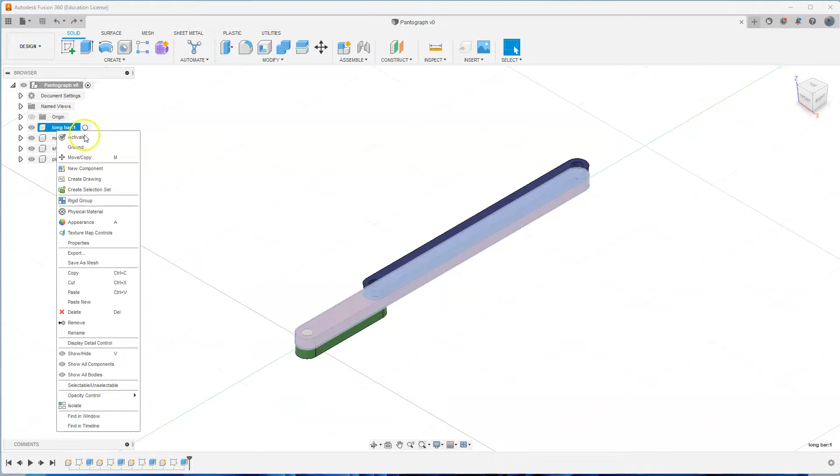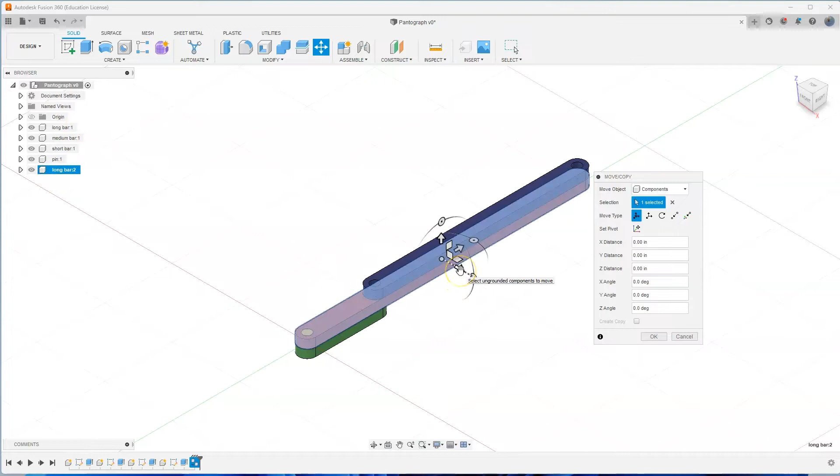To make a copy of the long bar, go right-click on long bar at the browser and just click copy, and then right-click on the pantograph on the parent and hit paste. And one instance of the long bar is actually on the same place where long bar 1 is. And as you can see, it says long bar 2. All you have to do is drag or move that long bar to a different position for you to see it. So click OK after you've done that.

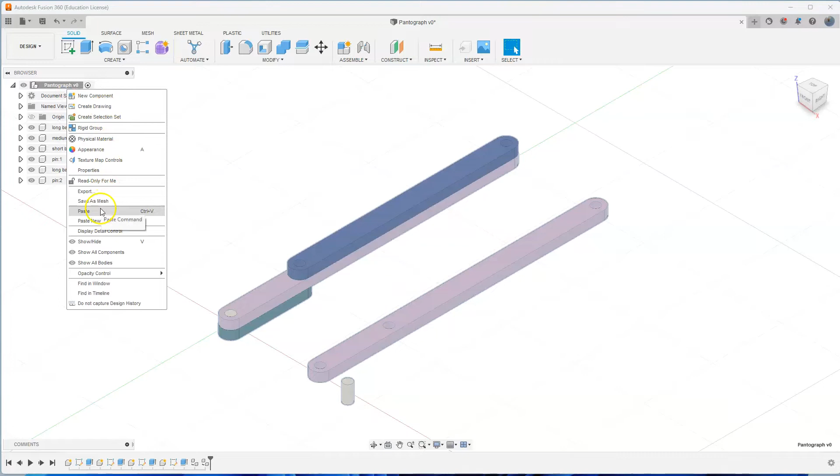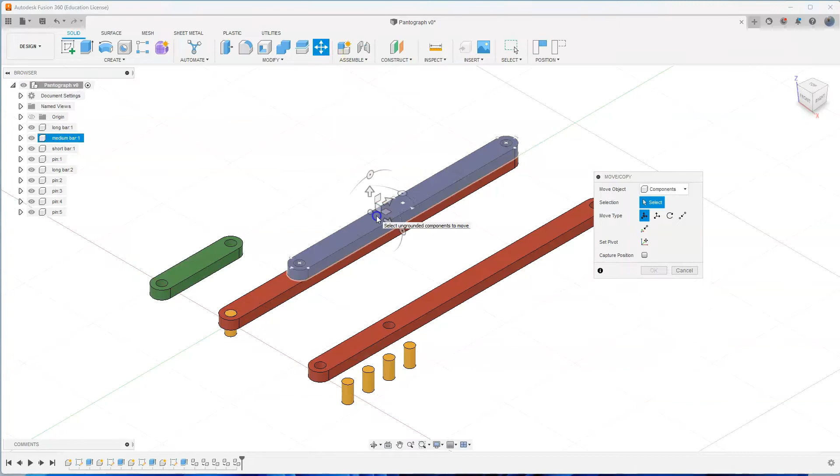All right, we also need to make copies of the pin. We need to make 4 copies of it. So right-click pin, copy, and then right-click on pantograph, hit paste, move the copy. So that's 1. And then do 3 more, paste. So that's 2. So now we have 5 pins in total. And let's just move the short bar as well, and the medium length bar. Okay, let's do the same thing with this first pin.

Now the next step is for us to create joints. So click joint, and then you'll notice that we are going to attach joint origins. So if I move my mouse on top of the pin, you'll see something showed up. That thing is called a joint origin. It says place joint origin on a component. And normally a component would have several joint origins, one at the top, one at the bottom, somewhere in the middle, and also it sometimes shows up on the edges.

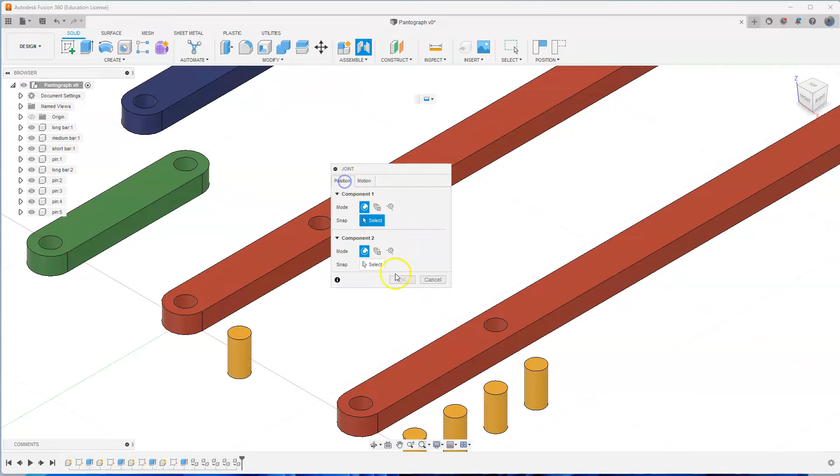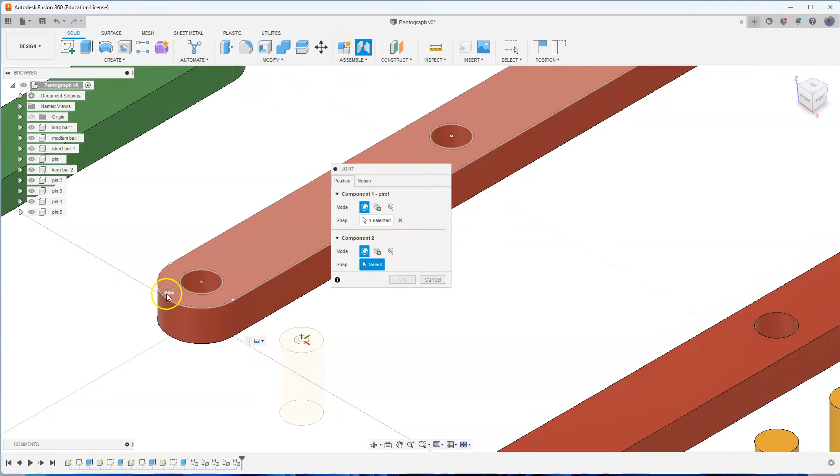For the motion, we want it to be rigid. So let's attach one joint origin here at the top. And the behavior is once you attach a joint origin, that component becomes less visible until you select a second place for your second joint origin. So for the second joint origin, we're going to put it on the first hole. And there's several ways for you to select the first hole. You could move your mouse on the circles or on the arc of the slot. As you can see, I could select the middle still. All right, so let's just do that there.

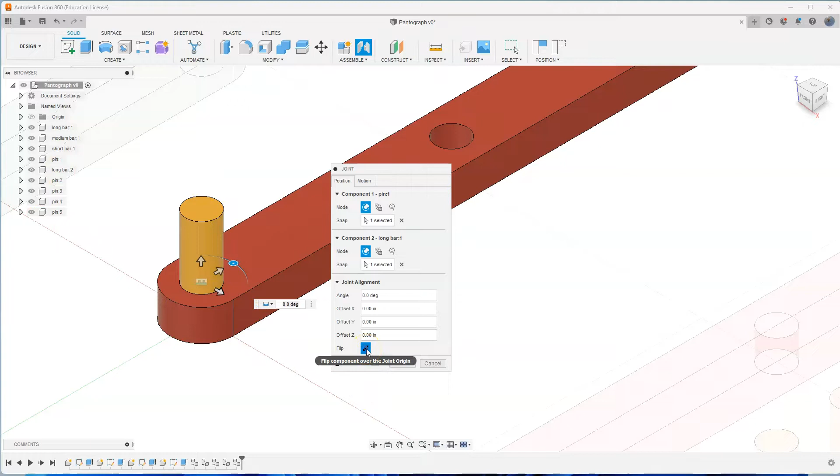And this is the correct orientation of the pin. If your pin attached in a different way, you might have to click on the flip button, which is this one right here. Let's say you attach it and it came out like this. So all you have to do is click on that flip component over the joint origin and then click OK. So let's try to move this component. So both of them are now together in a rigid joint. And if I move the long bar, or if I move this pin, you can see both of them move at the same time.

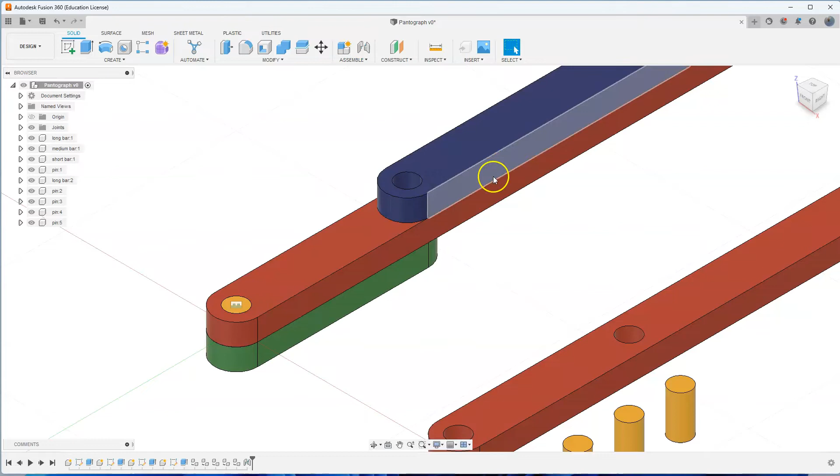So let's revert back to the old position. So click position, revert position, and it just takes back. Oh, let me undo that. I don't want to revert that position. So let me just drag it here, just so that we have a starting point instead of reverting the position of all of the components.

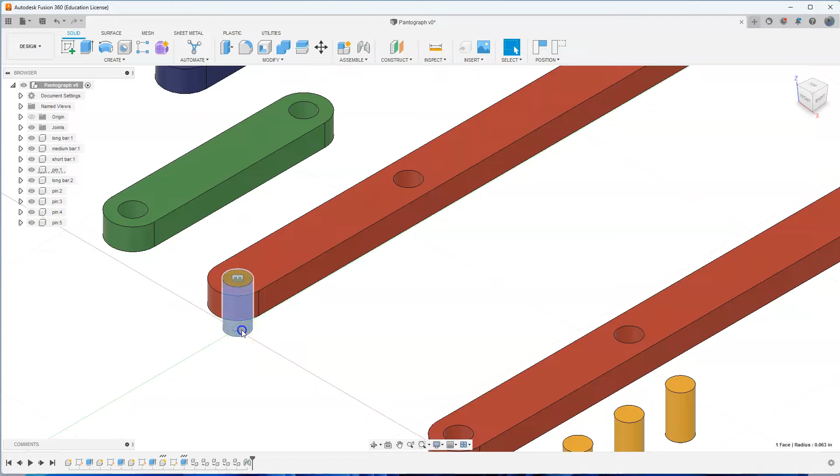The next thing we want to do is we want to right click at pin 1. So this is pin 1. I want to right click on pin 1 and ground it. Okay, and then just capture the position. And so now, if I try to move the long bar, it won't move along with the pin because the pin is grounded, so the long bar won't move at all also.

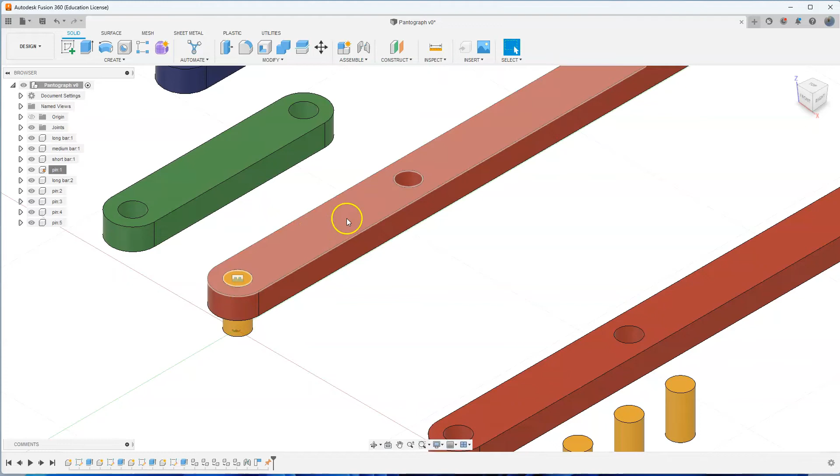Okay, so let's go ahead and let's do the next joint. Click joint and let's go to motion, and this is another rigid joint. Click the top of another pin and then click the top of the second hole. Click OK. And that's the next one.

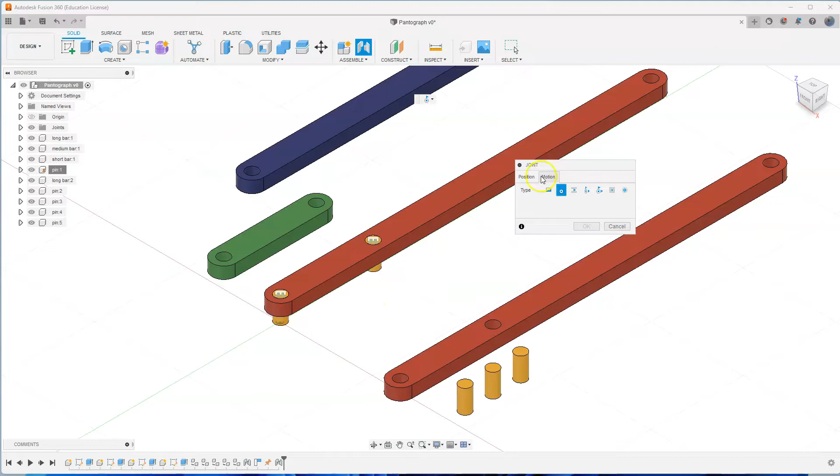All right. Now we're going to do another joint, but this time we are going to create a revolute joint, which allows components to rotate around an axis. For this one, I'll click at the bottom of this pin, the second pin that we put, and the bottom of the green one.

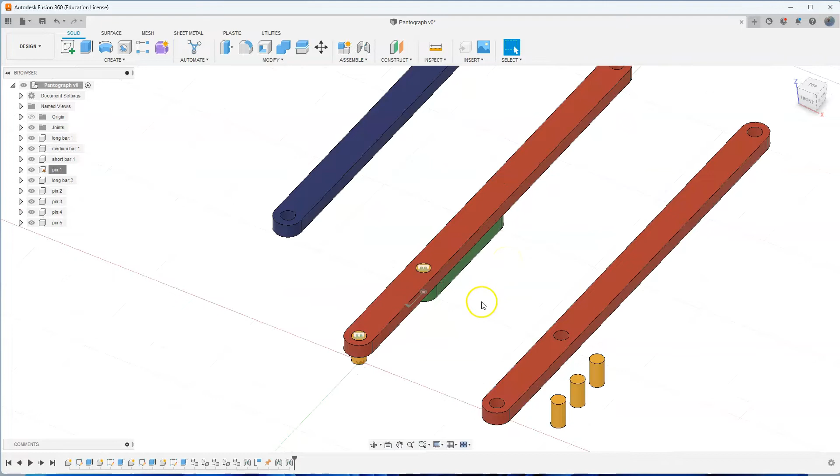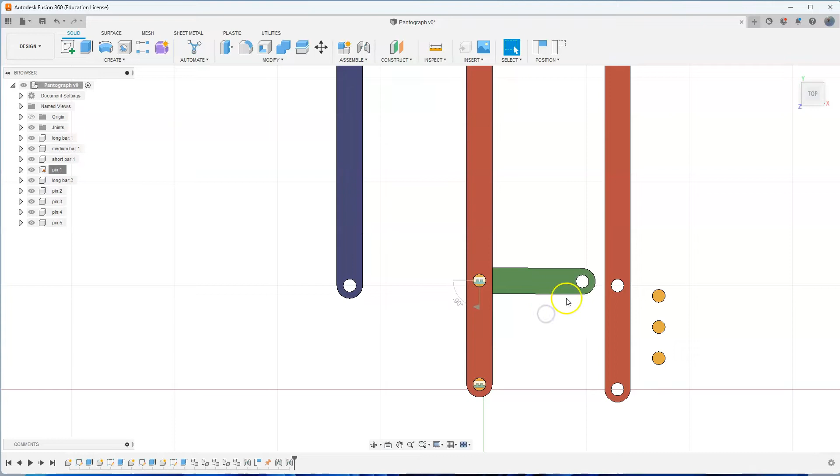Okay, click OK. As you can see, the short bar went under the long bar, and it could now rotate freely around that pin. So if I click, I could rotate it. I want this at 90 degrees. You'll see the angle showing up right here, so let's say negative 90 degrees. That would be that, and I will capture that position so that it stays there.

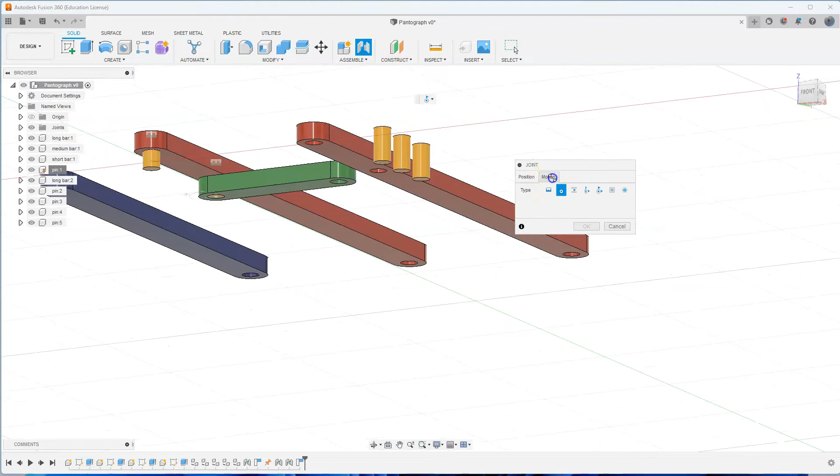All right, next let's attach another pin. So joint, and select the bottom of one pin. Let's make it another revolute. Let's select this pin and select the bottom of this hole, then click OK. So there we have another revolute joint connecting these two.

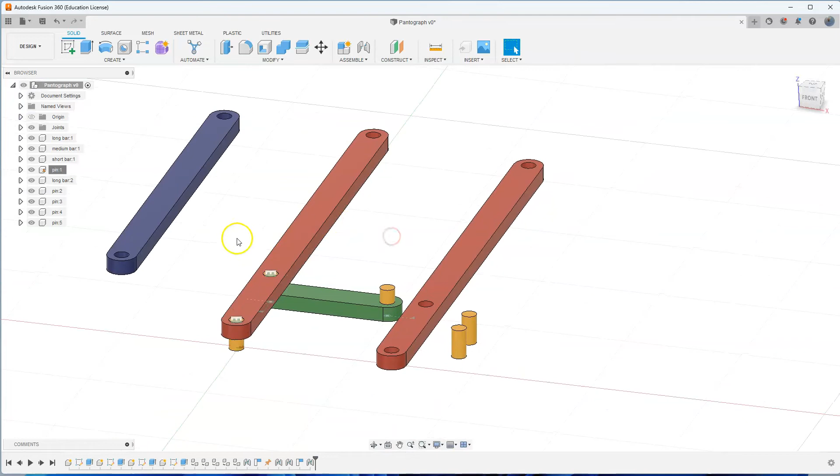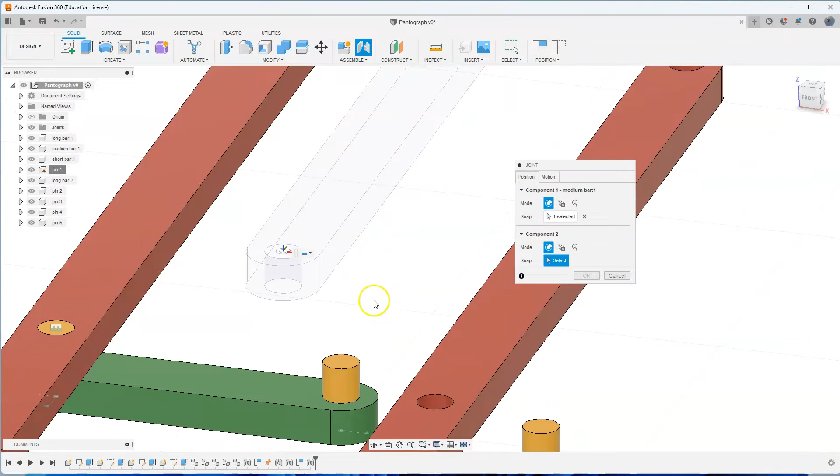Next we are going to add the medium bar to it. So joint, this time we are going to create a rigid connection between these two. Click at the top, and then click at the top of the pin. Then click OK.

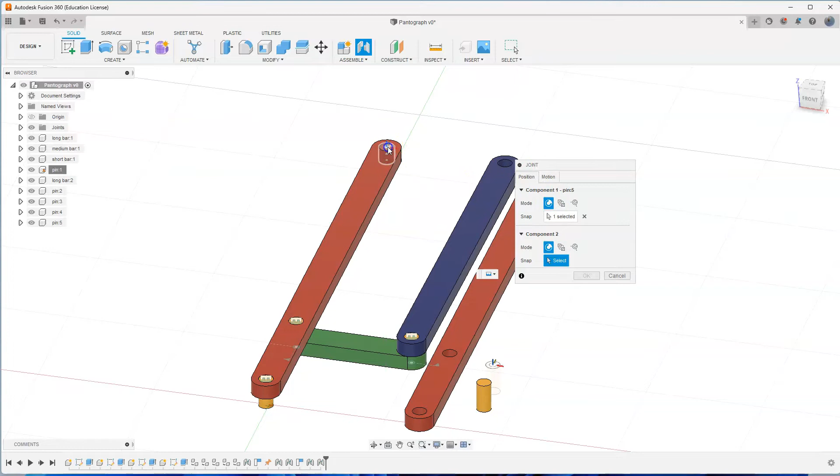Next we're going to add another pin using the joint command once more. Click on one of these pins, doesn't matter which one, and we are going to do a rigid joint again, then click at the top of this hole of the bar and click OK.

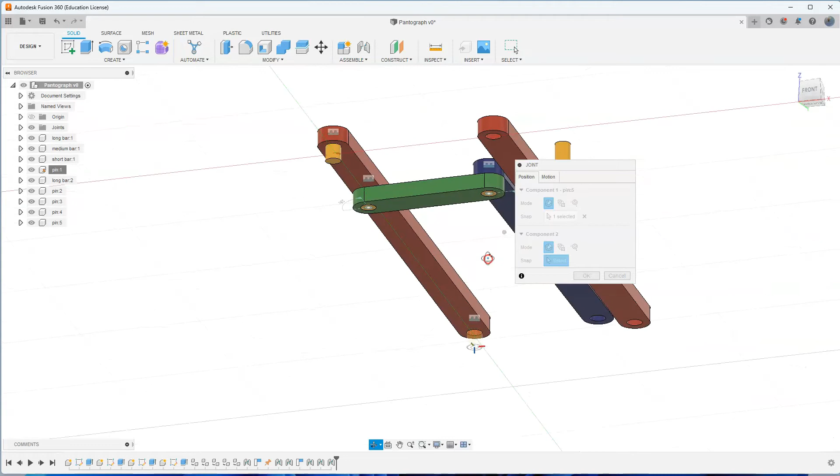Okay, next one, let's do another joint. This time we're going to do a revolute, attaching this with this piece. Click OK, and let's see what happened. All right, it got attached right there.

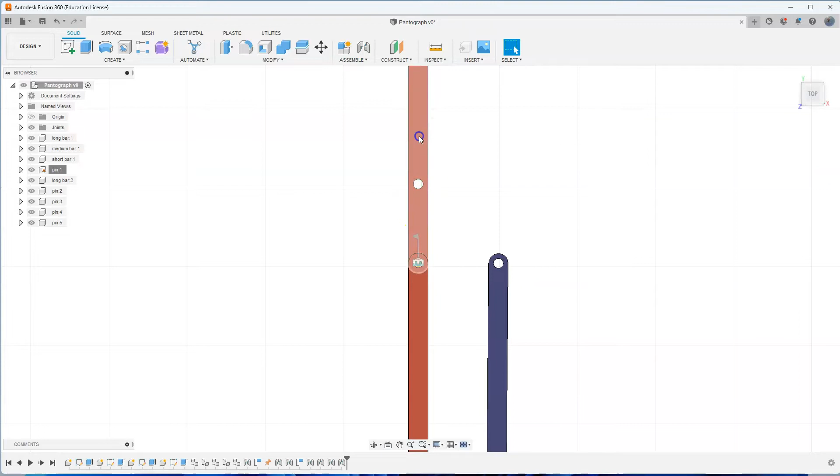Let's click at the top so that we could see it. Then we're going to rotate this, and you'll see the angle. I'll rotate it at around 90 or at 90 degrees, and I will capture that position.

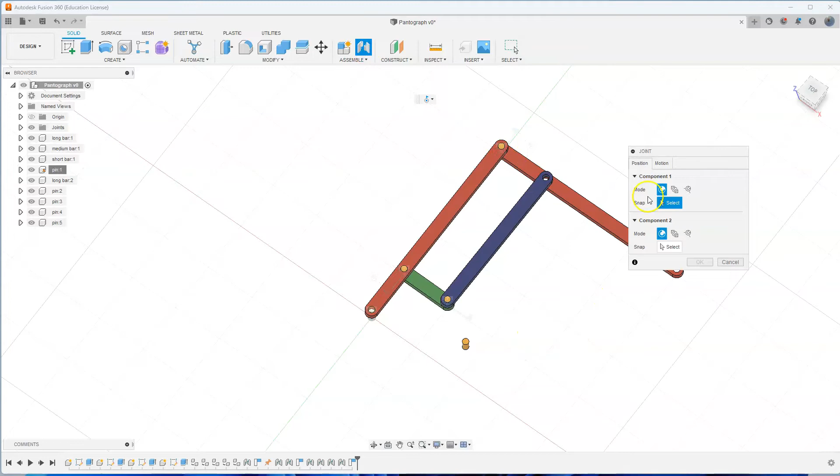So the last one is for us to put this last pin. One more, let's create a joint. Let's create a rigid joint for now. Click at the top and the top of the hole as well here. Click OK. I'm just going to move this bar out of the way.

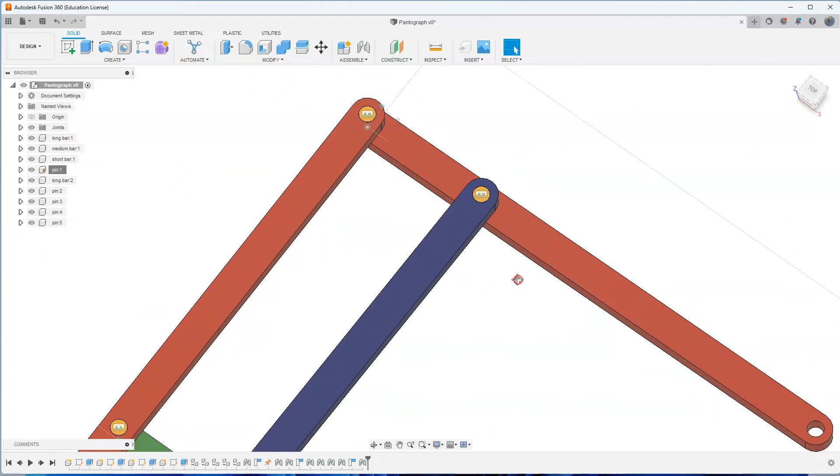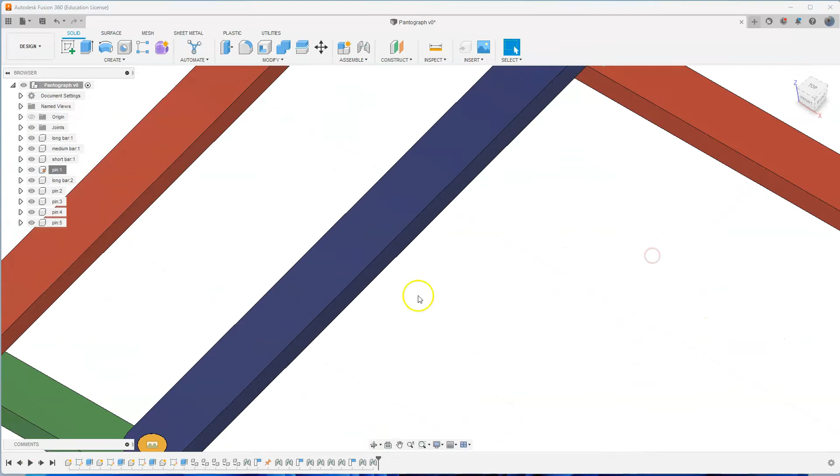And I will create another joint. This time we are doing a revolute once more. Click here at the bottom of the pin, and then bottom of this hole. Click OK. Let's zoom out and test our pantograph and see the movement.

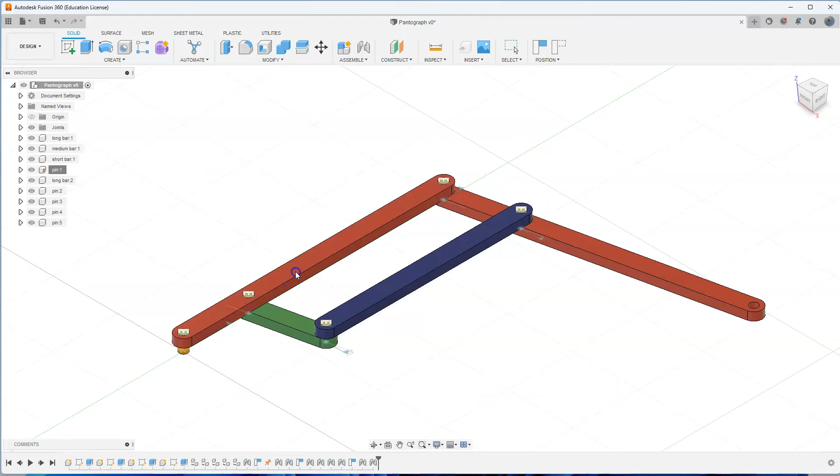So if I click and drag on the medium bar, you'll see that I'm able to create movement. If I select the long bar, it won't move at all, and we normally want that to move, which means this joint that I made should have been a revolute joint.

So I could go edit joints by going here where it says joints, and the first rigid. As I select rigid 1, you'll notice that this gets highlighted. I could right click there and edit my joint, then click motion and change the motion to revolute, click OK. Now if I move this, I could push and have that move around the axis of the first pin.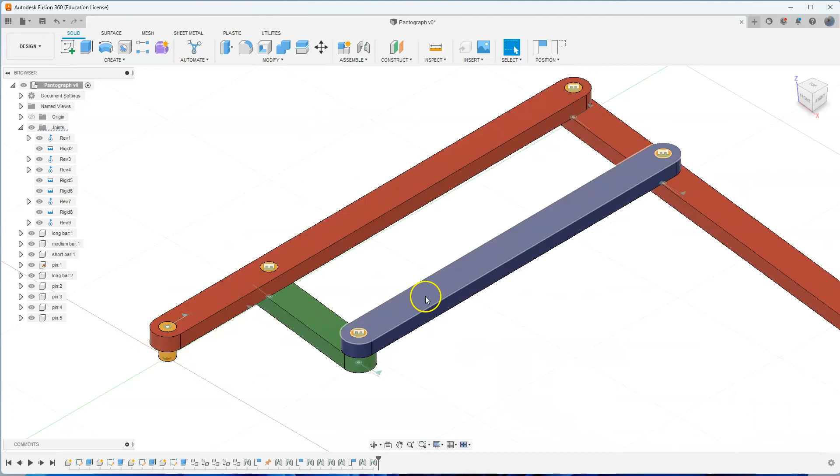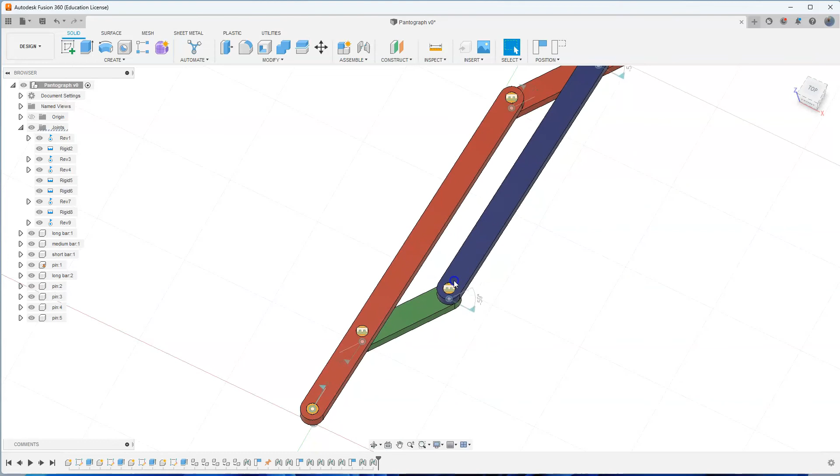All right, so the only problem with this is if I do this, there's interference. As you can see, it would go inside, and that's something we don't want, like that. So we don't want that to happen.

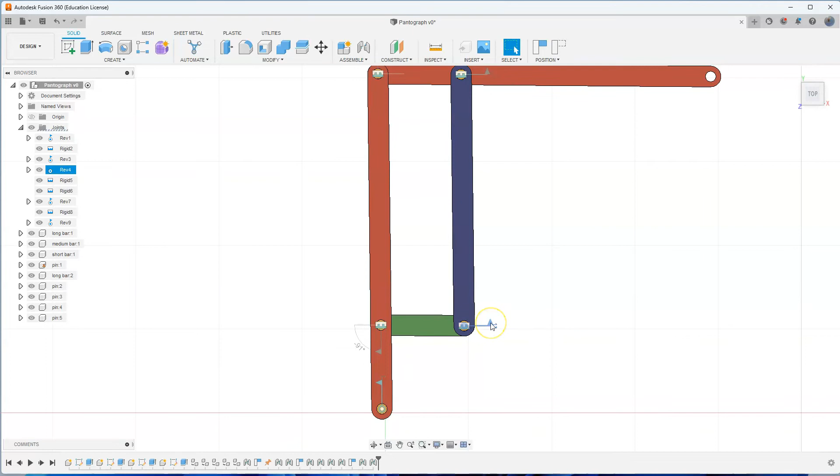So what I'm going to do is some edits on the revolute mate, or the revolute joint, of this one right here. If I select that, it says it's number 4. Let me go on revolute number 4 and click on this down arrow. It says edit joint limits, and then I could supply a minimum and a maximum.

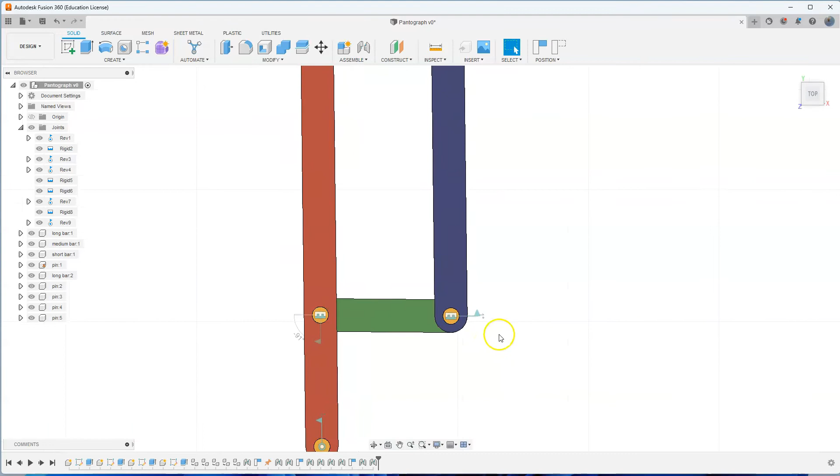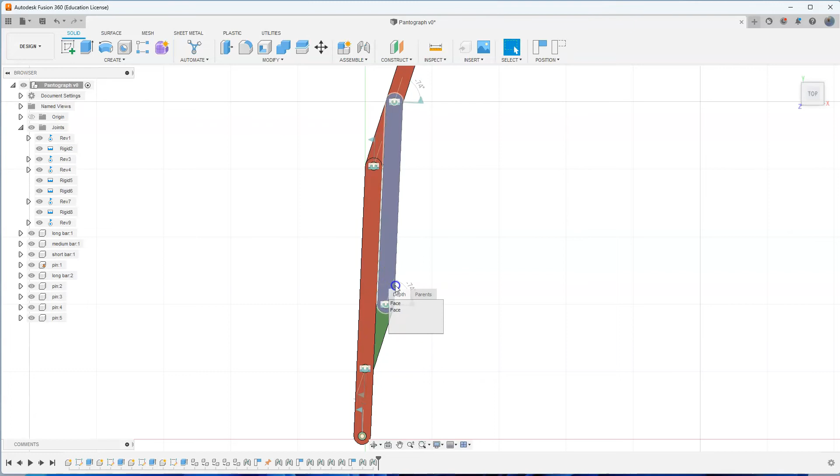Let me show you what minimum maximum means. If I move this, you'll see an angle shows up right here. If I go this way up like that before I hit the long bar, that is negative 74. If I go the opposite way, it would be plus 74 or 75 in this case.

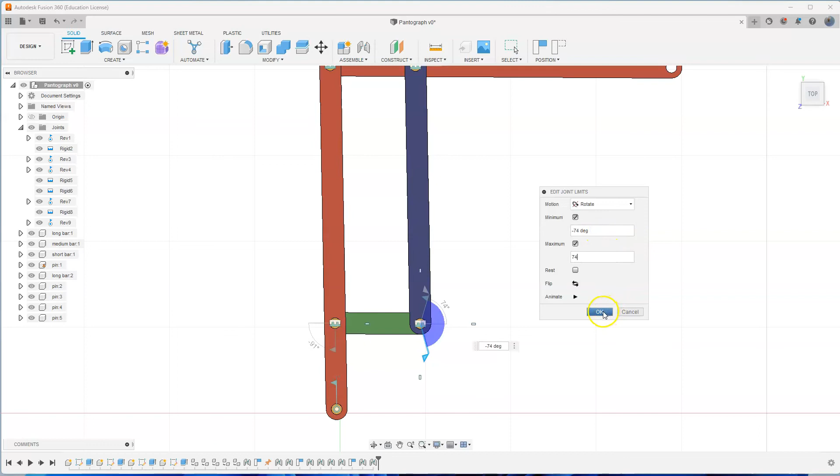So I'm going to use those two numbers. I go to revolute 4, click on edit joint limits, and have my minimum to negative 74 and my maximum degrees to 74. So if I click OK, you'll notice that I have a limit. I could only move up to there and only up to here.

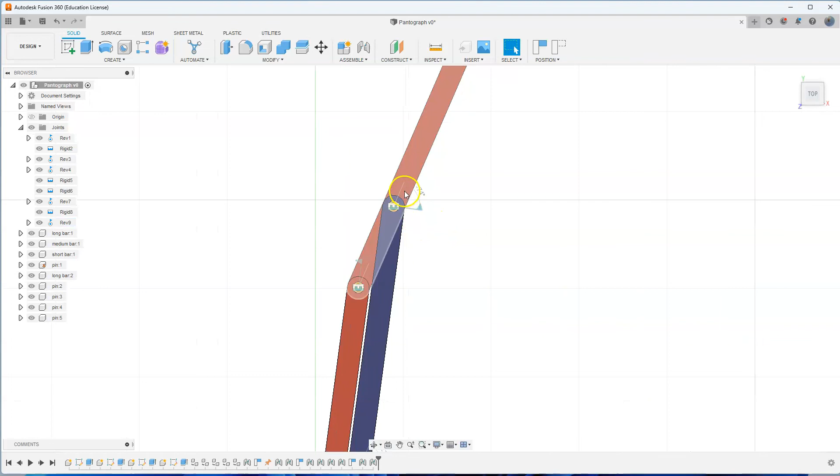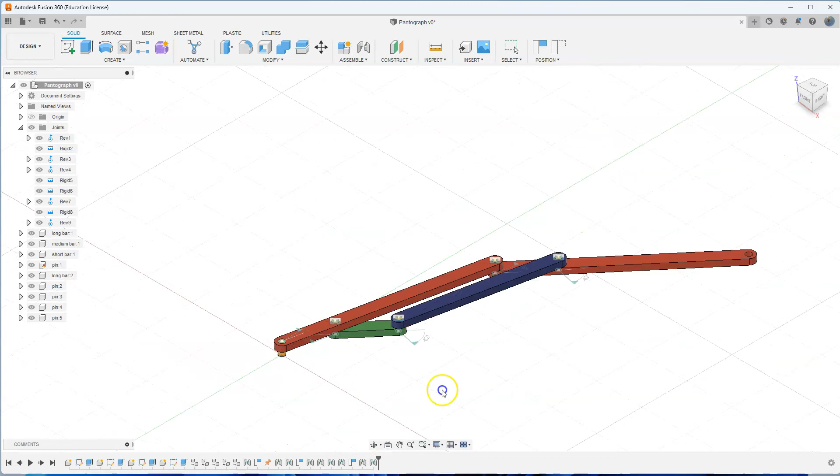Okay, however I also have a revolute here which could go past. So let's do that again. I just rotated it, let's see if I could force it to move past it. I think it doesn't. So it looks like just by doing that, we could limit the movement of the pantograph, and further changes on the other revolute joint are not needed.

And that concludes this part of the lesson, so don't forget to save your work.